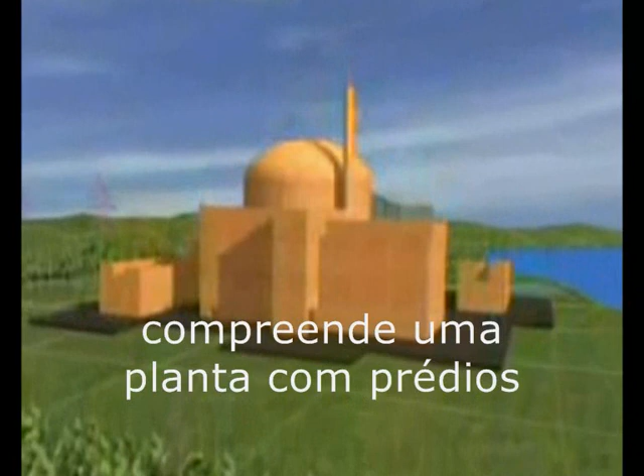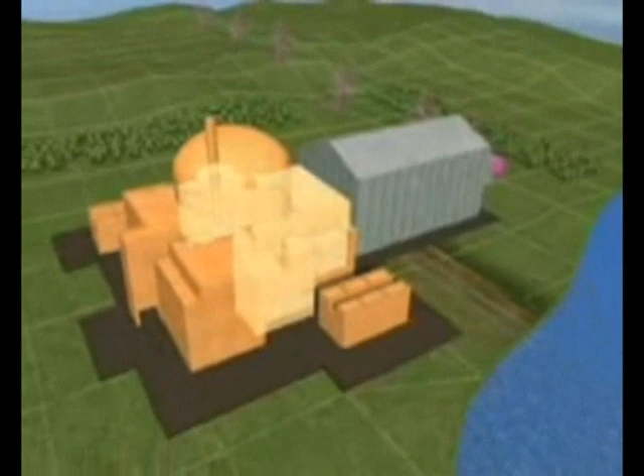A pressurized water reactor power plant comprises a nuclear island with buildings that house specific equipment: the reactor, nuclear auxiliaries, safeguard systems, fuel, and diesel generators. The plant also includes a conventional island with a turbo generator set which produces electricity.

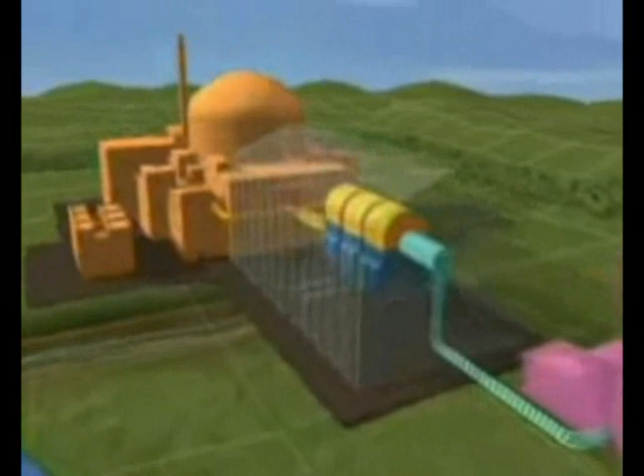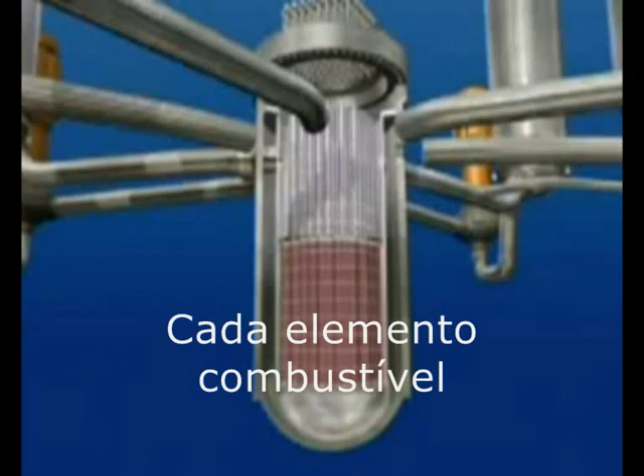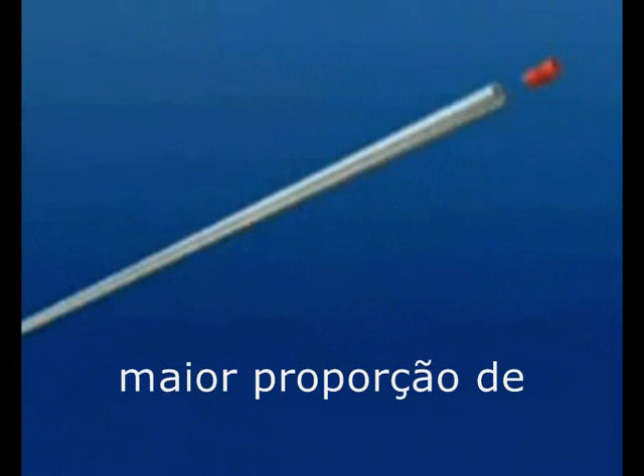The energy production process begins with the fission of uranium atoms inside the reactor core, which contains nuclear fuel assemblies. Each of these assemblies contains several hundred sealed tubes, each containing pellets of enriched uranium, enriched because it contains a high proportion of uranium-235, the fissile element.

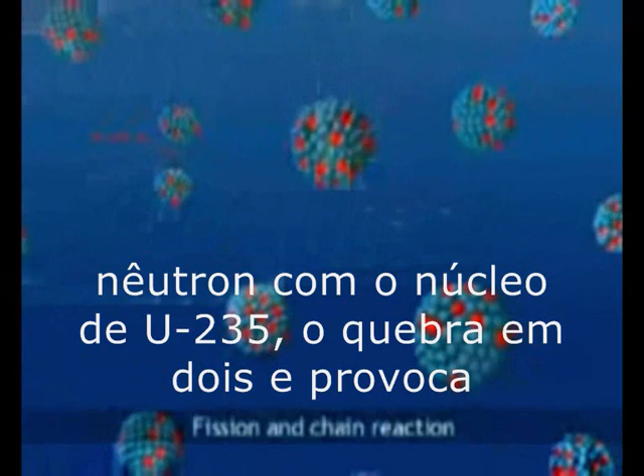In the process of fission, the collision between a neutron and the nucleus of a uranium-235 atom splits the nucleus into two fragments, ejecting 2 or 3 neutrons. These neutrons are free to split other fissile nuclei, thus maintaining a chain reaction which produces high levels of heat within the fuel tubes. These tubes then transfer heat to the primary circuit water, simply by contact.

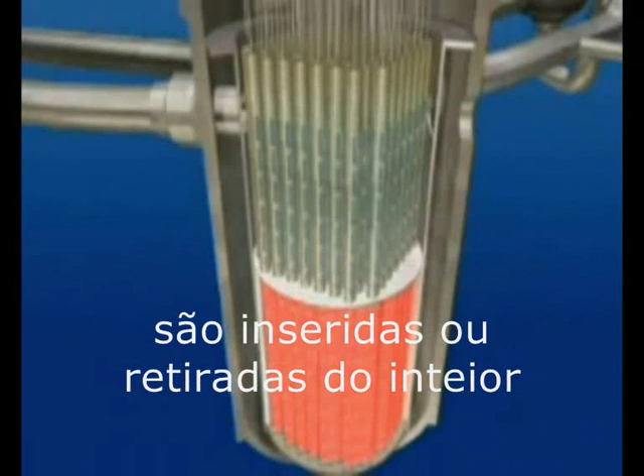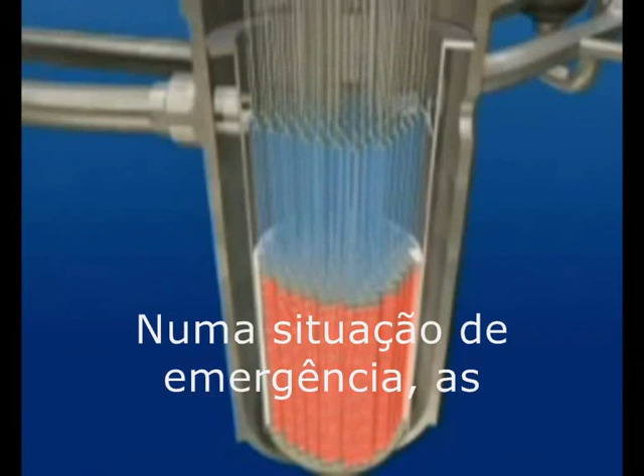The chain reaction is controlled at all times. Control rods made from neutron-absorbing material are lowered into or withdrawn from the core to control the nuclear reaction. In the event of an emergency, the control rods drop by gravity into the core, stopping the chain reaction within 2 seconds.

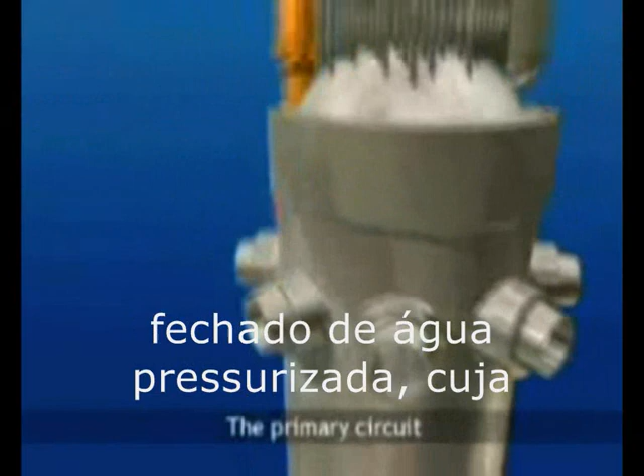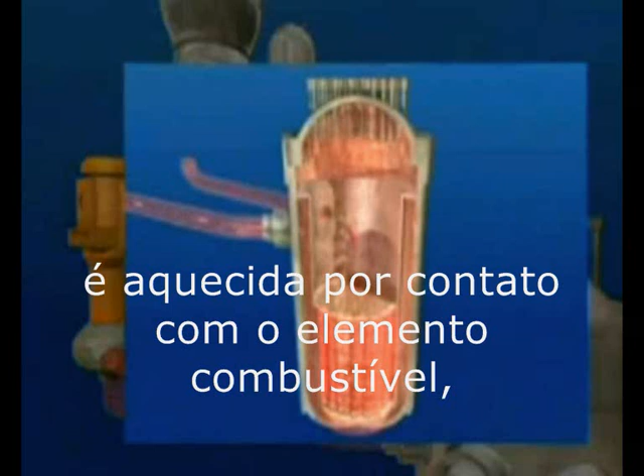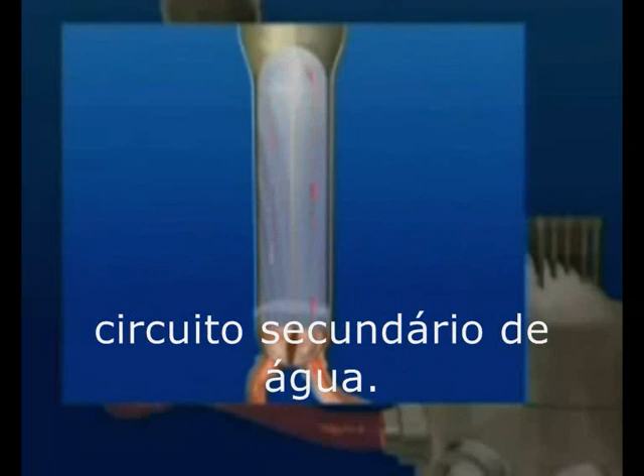The primary circuit is a closed circuit of pressurized water whose function is to extract heat from the nuclear reactor. This water enters the reactor vessel at 296 degrees Celsius, is heated by contact with the fuel assemblies, and exits at 327 degrees. The water then passes into a steam generator, where it transfers its heat to a secondary water circuit. Water in the primary circuit is pumped through the various components.

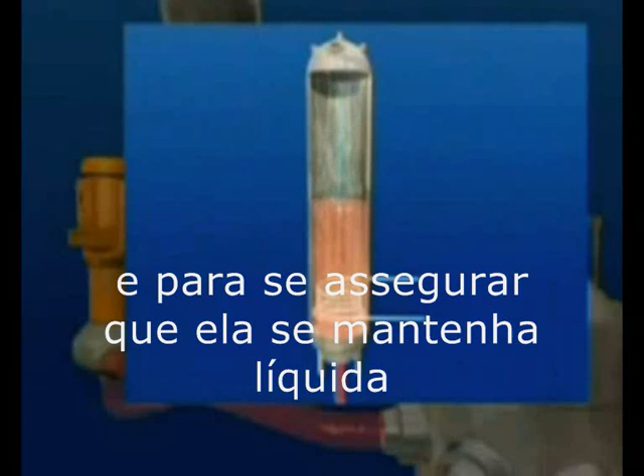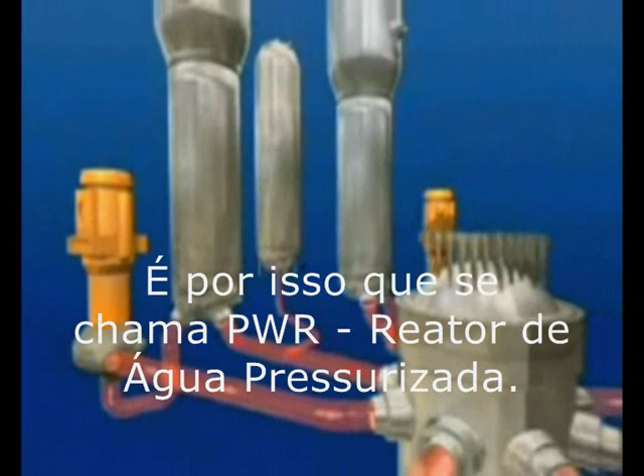To assure that water in the primary circuit remains in a liquid state, a pressurizer maintains the constant level of 155 bars. Hence the name, pressurized water reactor. The reactor shown here has 4 primary loops surrounding the reactor vessel.

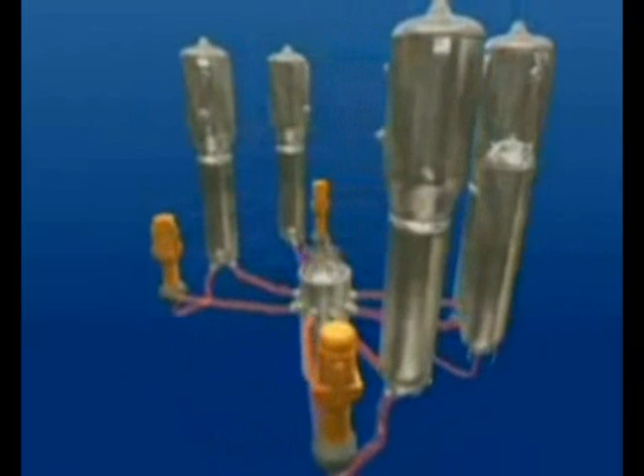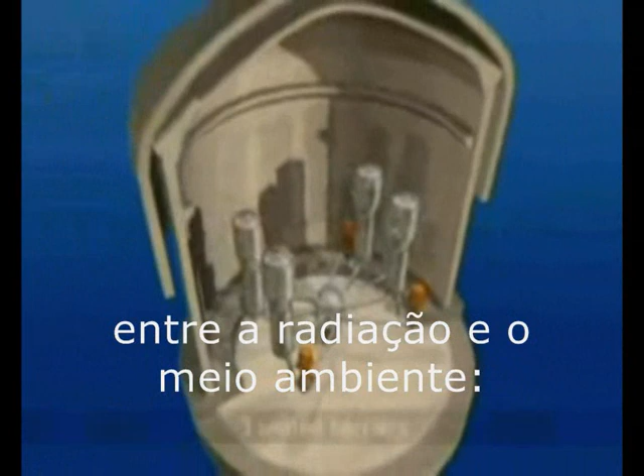One of the fundamental features of reactor safety is the interposition of 3 successive sealed barriers between the radioactive products and the environment: the fuel assembly tubes, the metal containment of the primary circuit, and the concrete containment building.

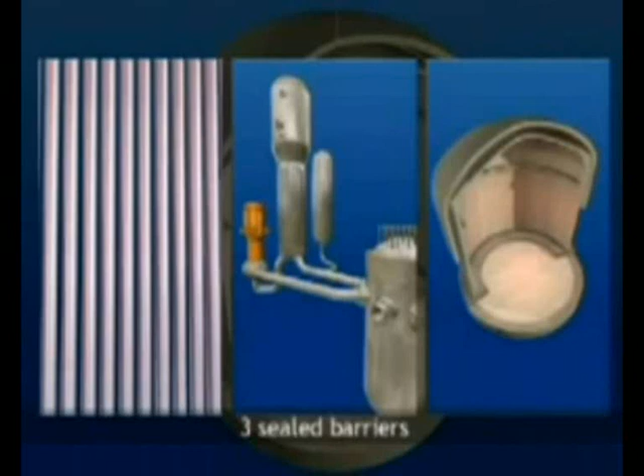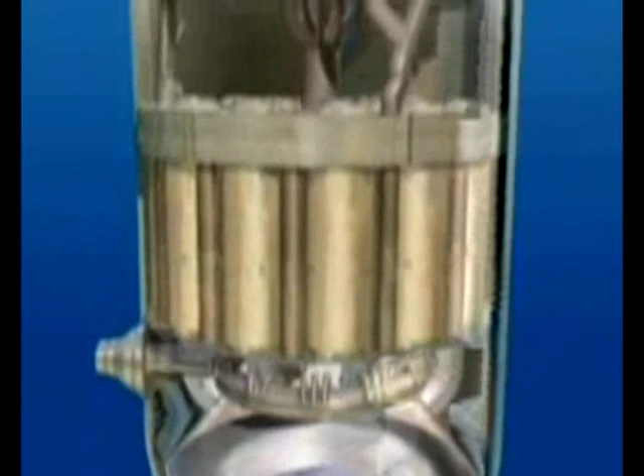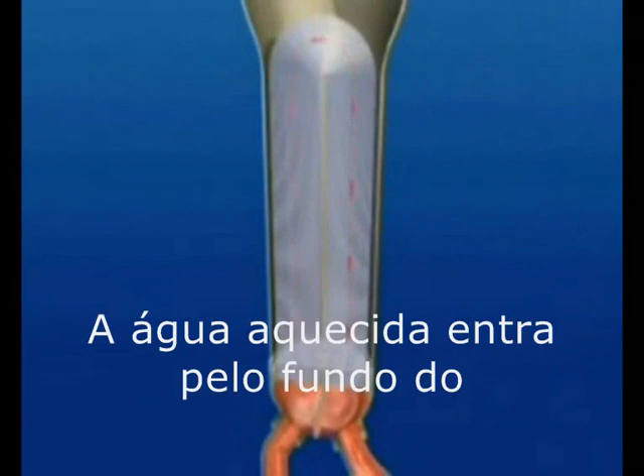Within the steam generator, heat stored in the primary circuit water is transferred to a secondary circuit. The heat exchange occurs within a bundle of around 6,000 inverted U-shaped tubes. The heated water enters the bottom of the steam generator, transfers its heat to the secondary system water through the U-tubes, then returns to the reactor vessel for a new cycle.

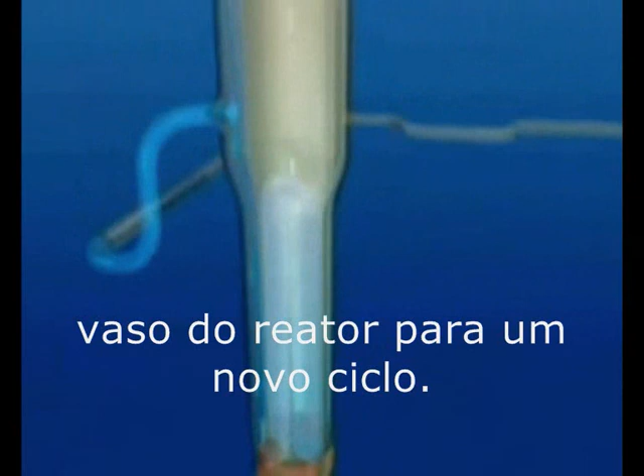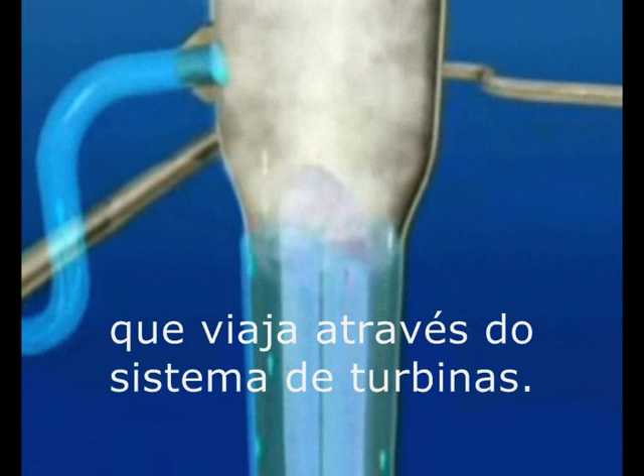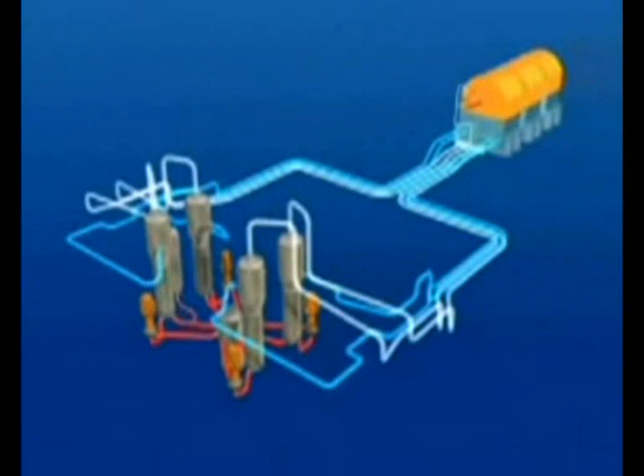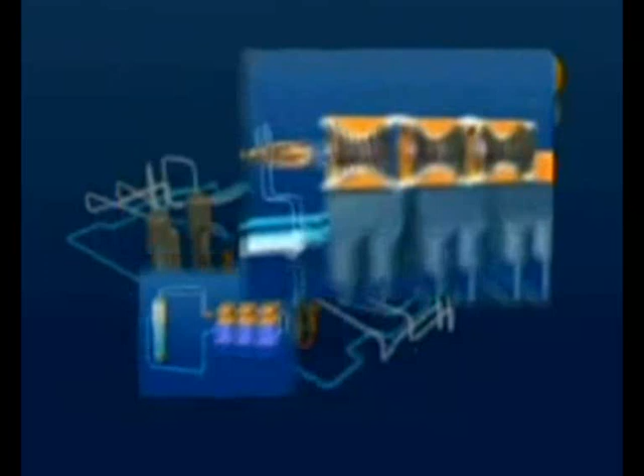Water in the secondary circuit flowing around the wrapper of the U-tube bundle is heated to boiling temperature, turns into steam, and then travels to the turbine set in an adjacent building. After passing through the turbine, the steam is recondensed into liquid water and returned to the steam generator for another cycle. Steam pressure from the secondary circuit drives the turbo generators to produce electricity.

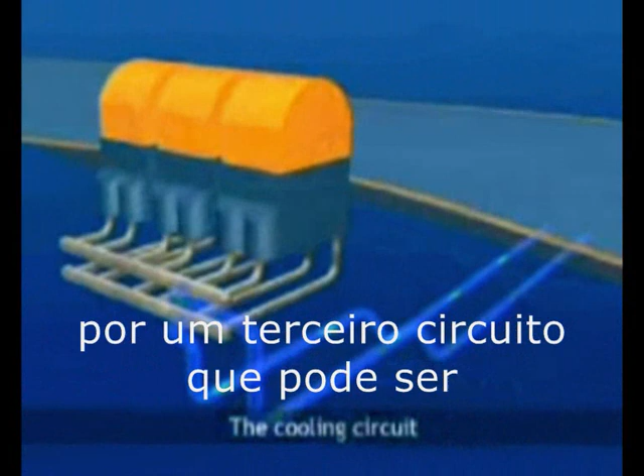Secondary circuit water is cooled by a third circuit, which can be sea or river water. The condenser uses water pumped from outside the power station to cool the secondary circuit.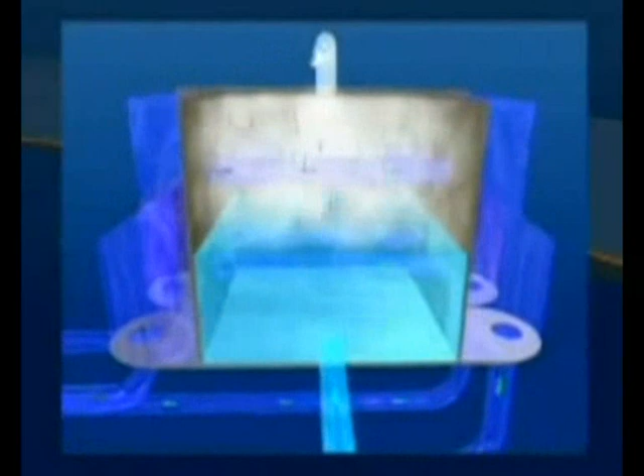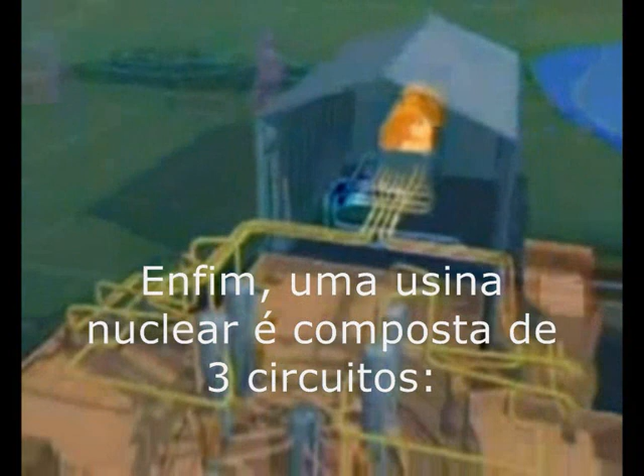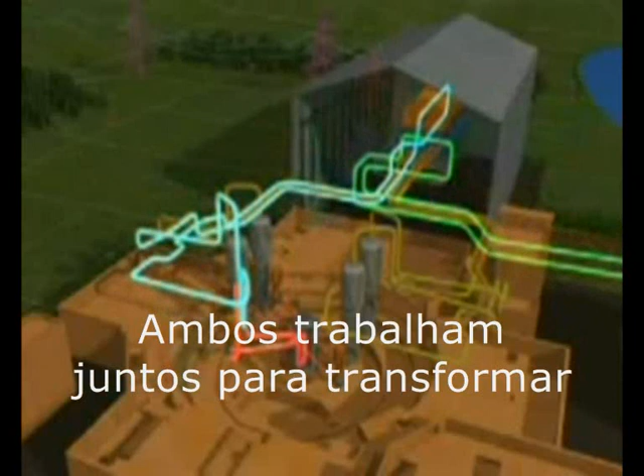To summarize, a nuclear power station is essentially 3 circuits: the primary and secondary circuits, which are both closed, and the cooling circuit, which opens to the exterior. Both work together to transform the energy liberated by nuclear fission into electricity. Harnessing the proven and optimized technology of pressurized water reactors enables us to meet the energy needs of society in a most efficient and safe manner.